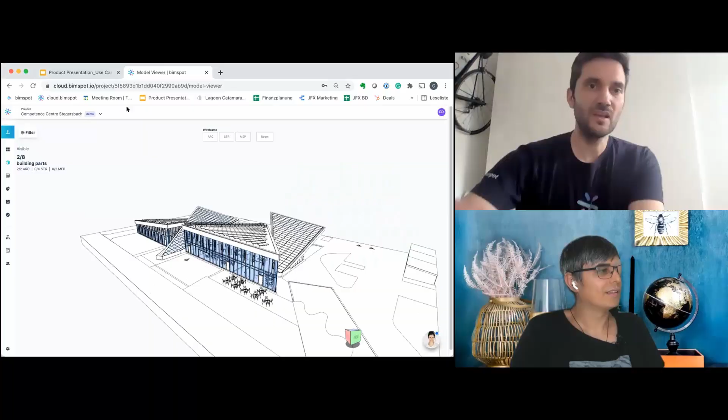So this is the platform itself. Before we dig deeper here, I want to give a short overview via this presentation. As I already said, we are based in Vienna. We founded the company with really big experience out of the industry, so we are delivering a very certain expertise on BIM consulting.

We are trying to convert this into the product. So we are really trying to deliver a technology which helps in the daily business and also be very close to the market. Our users are basically coming from around the world, so we are a global solution, not just focusing on the European market, but also in other important markets where BIM is already in use. But I don't want to talk too much about this part. What I want to show you is actually the way, or first the problem we saw.

We are deeply convinced about the openBIM workflow, that this is the way the collaboration can be solved in a team. And what we saw is we have a very complex and always different situation with the software landscape in a project. Every project is different, every stakeholder is always different, so we end up with a very diverse situation from the software side. This leads to a very complex process of collaboration, of sharing information, sharing models. And this process is usually defined in documents, so you have this BIM execution plan where everything is described.

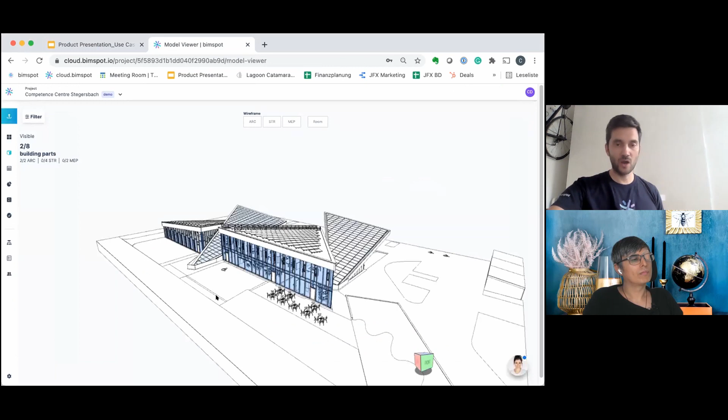And I will now jump to the platform itself to give you a brief overview over our functionality and how you can use it. I would really like to see how you start, how are the first meetings when you hop in a project, and how you establish the base that you are going to need and use afterwards?

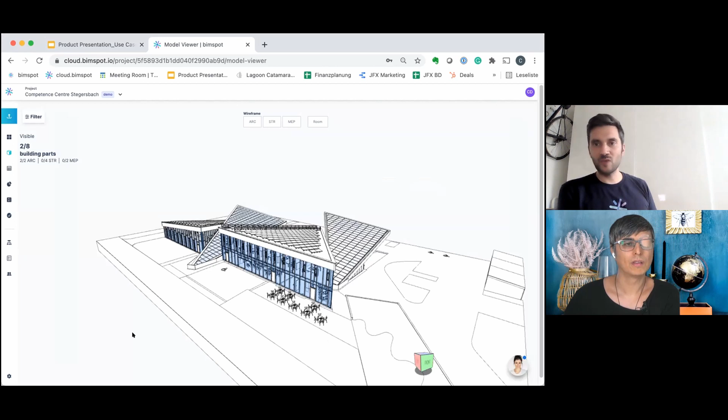There are basically 2 ways to do it. The first one is if the BIM goals are very established, known ones, then we have ready to go templates for that. So for some certain things like cost estimation, we already have everything in place where you can actually start right away. If it's more project specific, so you want to maybe achieve some additional things, or you want to modify these use cases, then we are helping you to set up the requirements in a way that these use cases are possible.

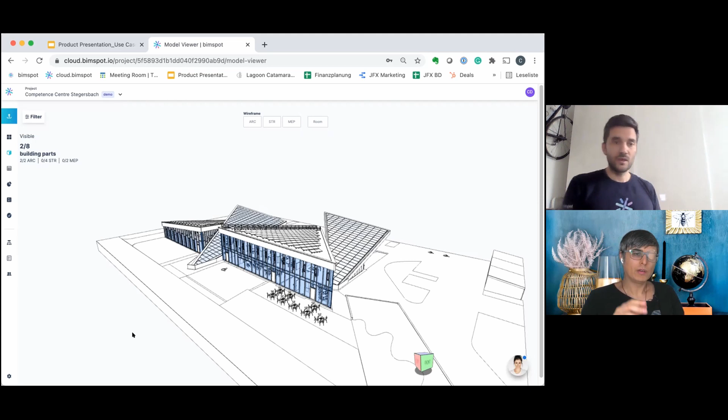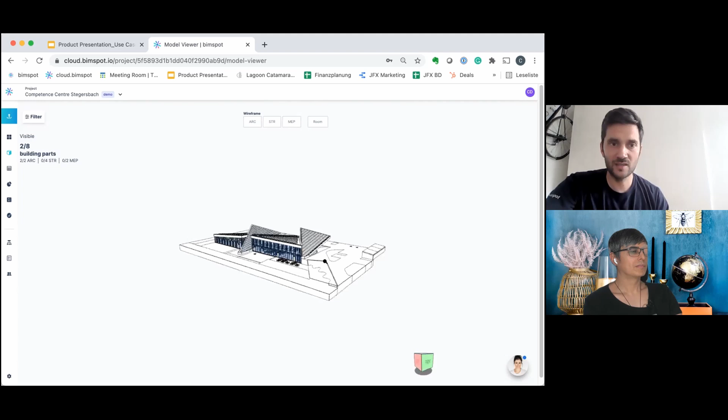And yeah, it's a very clean interface. As I said, it's for everybody who is actually not a BIM pro, but also wants to participate in the project. On the viewer, we have two very interesting things. The first one is if you click on an element, you will see all information which comes in this case out of Revit. This, I think, is not a big surprise. This is the same in every solution.

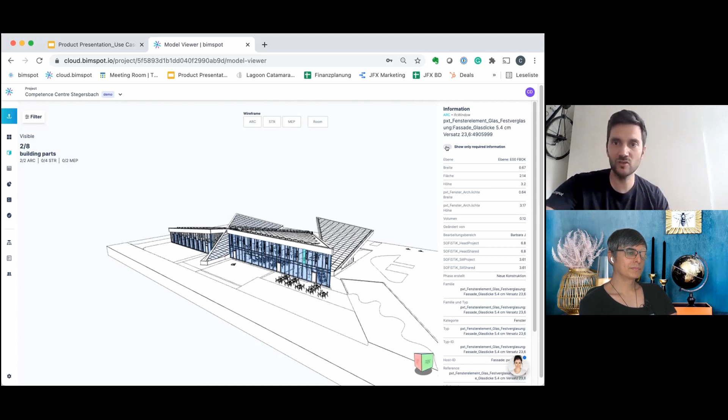One thing is now different. You can change here to show only required information. And this is now exactly what is defined in the section with the matrix, that this is the information that is required in this phase for a window. So just this information is needed or is defined in the project team. You can see here that actually a lot of the information is just coming via the export, but it's not quality checked, and it's actually also not needed for other parties. So in this case, it's just about the window - if it's an external window, thermal transmittance, and height, width, area. So actually a few pieces of information.

Let me ask you something before you go further. How do you make sure that you work on the latest model? How do you keep this updated? Do you need to upload it all the time, or do you have any integrations with other tools, or how is this working? Currently, we don't have integrations, but it's a very easy drag and drop upload.

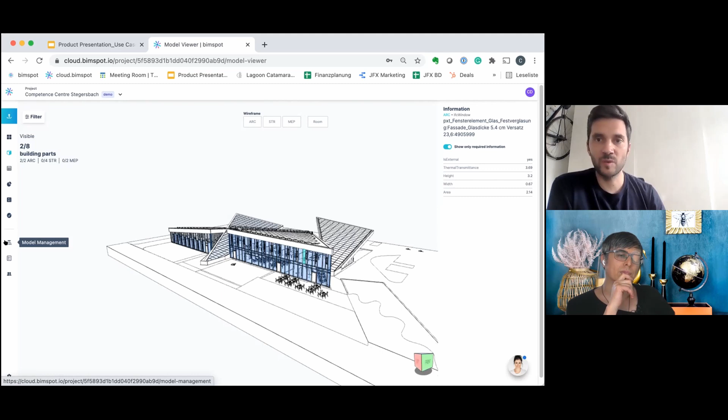So you have here the model management. You can set this up very easily, and then it's like a container - you just push the things in. And we are currently working on - so we have an open API, and we are actually currently working to integrate BIMSPOT with other solutions, so that this upload is not needed twice in the same way.

Yeah. Okay, but so what happens if you already have a model in place? Does it check and update only the changes, or how exactly does the revision control work? Depending on which revision control you look at - if you're doing the information, it does actually the whole thing. So you would always see the current state of the model, how much information is fulfilled or not fulfilled. So this is always a whole check.

In the quality check section, where you use the Solibri rule set, this is also depending on what checks you're running. But basically, it's about all the errors you find in the model. And if the error is not resolved, it would appear again.

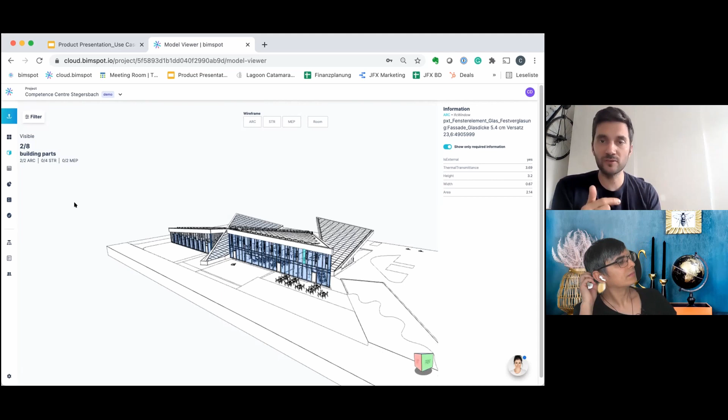How do you exactly start? You start first by uploading a model, right? Or you start by defining the rules? What exactly is the workflow here? Again, it depends on what use case is important for you. You can also use BIMSPOT just as a model viewer. Then you just drag and drop your model, and you have the model there, and you can turn it around and use the information in the model. So then you're already up and running.

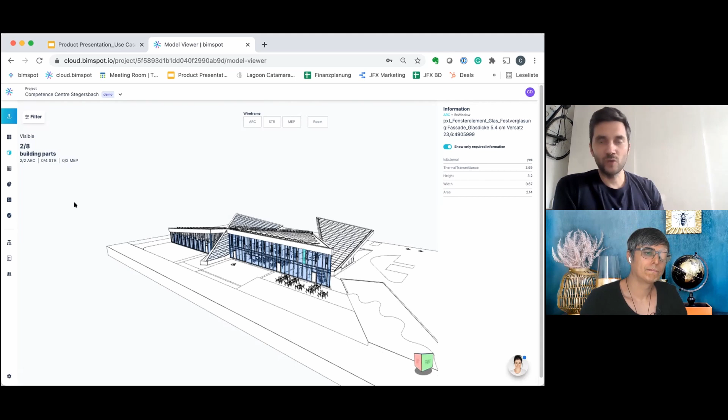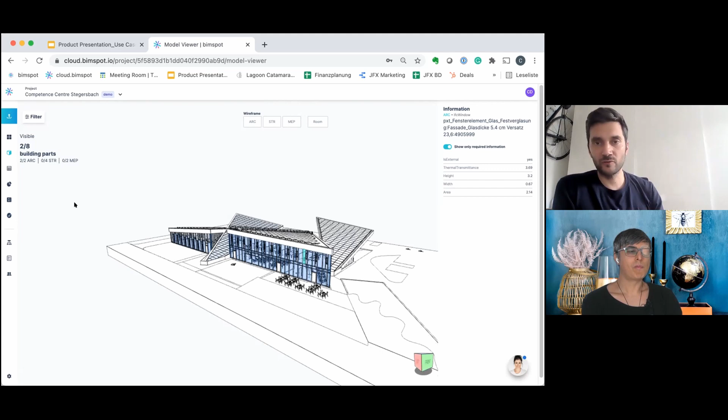If you want to do a quantity takeoff, for example, where you actually need to understand if the information and the model itself is correct, then you would start with uploading the model and also defining the requirements. We provide here a template where you can already start with. So by uploading your first model, you would already have the first features available for you. But usually you need to adjust to the specific namings in the project, and this is something where we can also help - if there is any need for adjusting this, we can step in. And depending on the quality of your model, you can start right away.

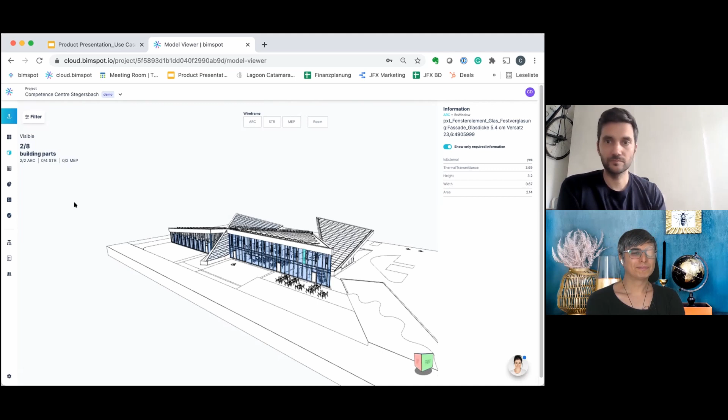Cool. All right, I just have 3 more parts, so I will introduce this also. One important thing is the filter. This is something you might know from other web solutions where you can just have a free text search on something, and in our case, you can actually query the whole building information model.

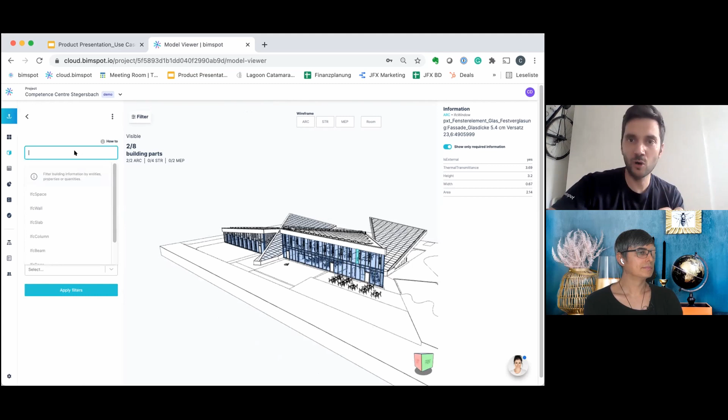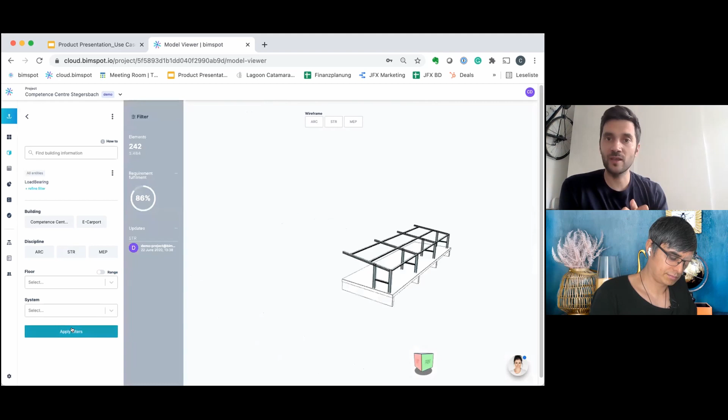So you can type in here, for example, you want the load bearing walls - you just go to load bearing, define a certain category. In our case, I will just say all entities and say apply filter. And this you can do actually on the category level, but also on the property level. So if you have in your project certain properties like room names or area names or whatever comes to your mind, you can always filter that here by this property.

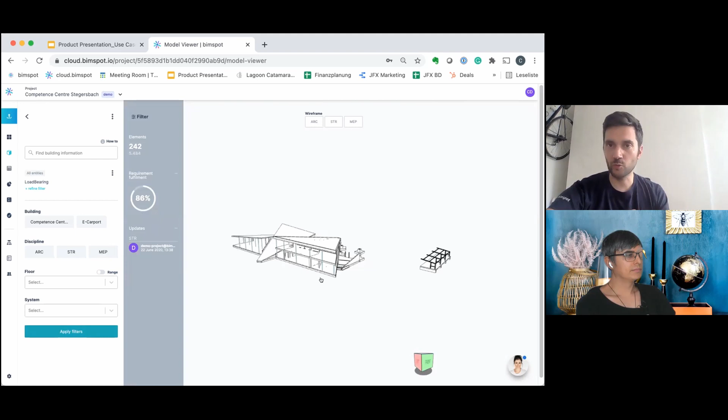You can say in this case these are all elements which are load bearing. You can also filter for, say, I want to see concrete elements that are not load-bearing, because that would be a mistake. So you can use this filter very specifically to understand the information in the model.

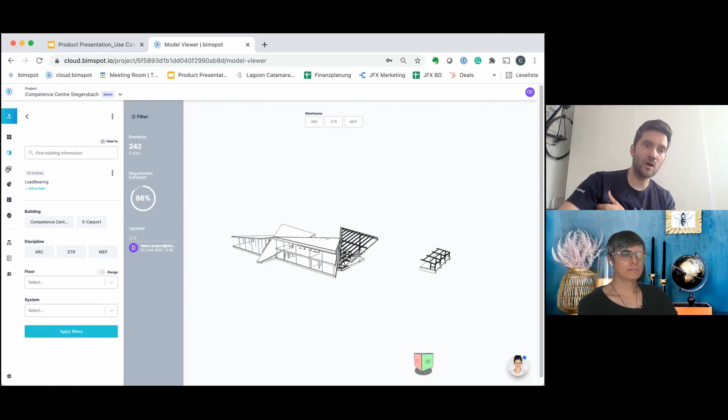This filter is very central because it's also the basis for further features. One is you can do a quantity takeoff with it. So you'd save the filter, load-bearing concrete elements for example, and go to our quantity takeoff section, where you'd get an Excel list you can use for cost estimation and other workflows.

This is very easy to define. You can filter for doors, or any element, any property you want, and you'll get a table with all elements and all their properties. This is what you get out.

The last part is a KPI dashboard, used for project controlling. This is also based on the filter. In this case it's set up for areas, but for project developers it's very important to always control the area of the project, to be sure the rentable area or the area you want to sell to a client stays within the project goals.

We use the information coming directly out of the model to update these numbers. You can set a target number and always know if you're on track or not. You can also use this for, say, concrete volumes. If you have a very expensive foundation, you could use these properties and this filter to get the sums of the volumes, to make sure the project doesn't go out of cost.

With every upload of the model, this will update and give you new results. It can be used very flexibly, and very intensely, for very different use cases.